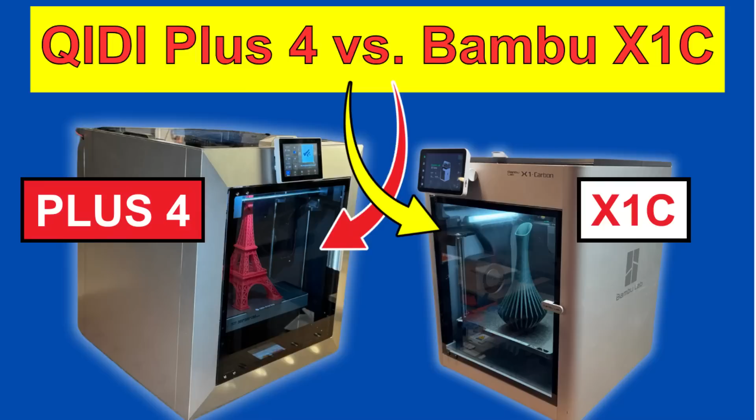The Qidi Plus 4 is a lower cost 3D printer compared to the Bambu Lab X1C. But is it a better value? That's what we're going to find out in this video.

Hi, I'm Ken of Wrist Innovations, and welcome to my Christmas edition of today's video to compare everything about the Qidi Plus 4 and the Bambu Lab X1C 3D printers, so you can make an informed decision on which one to buy if you're considering these printers.

I've organized the video into chapters listed in the description that will allow you to skip around the video depending on what is important to you. First, I jump right into comparing the print quality of both printers because I think that's the most important thing to consider when making a buying decision.

Next, I'll cover the key features of each printer and point out what they have in common as well as their differences. Then, I'll compare the unboxing and setup of both printers. Next, I'll review a required upgrade and a repair that I made to the Plus 4, followed by comparing the cost of both printers. Lastly, I will provide my final summary and recommendations.

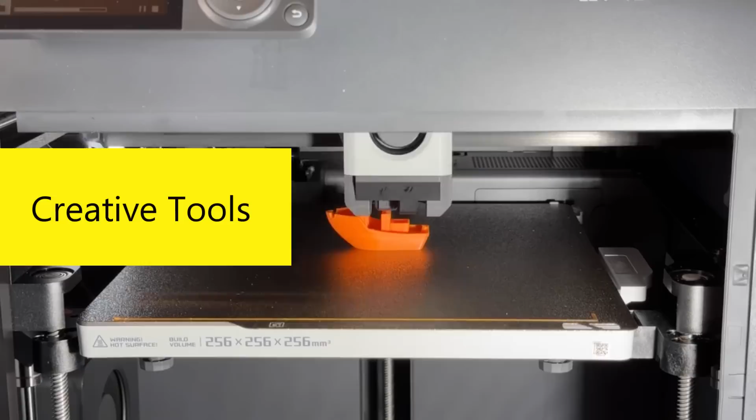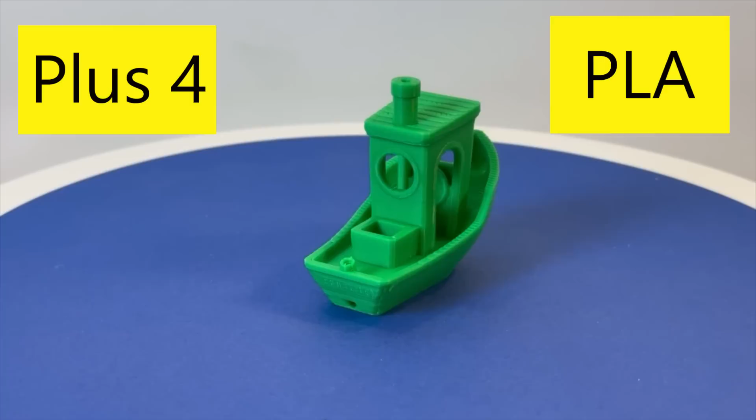I know this isn't a big challenge, but first I printed a benchy designed by Creative Tools in PLA on both printers. The X1C benchy turned out great, as expected. The Plus 4 benchy turned out very good. The back of the benchy looked like there was some under extrusion, but other than that, it turned out pretty well.

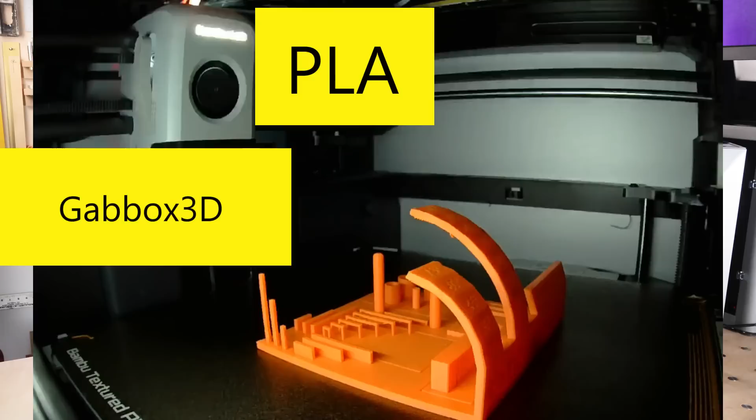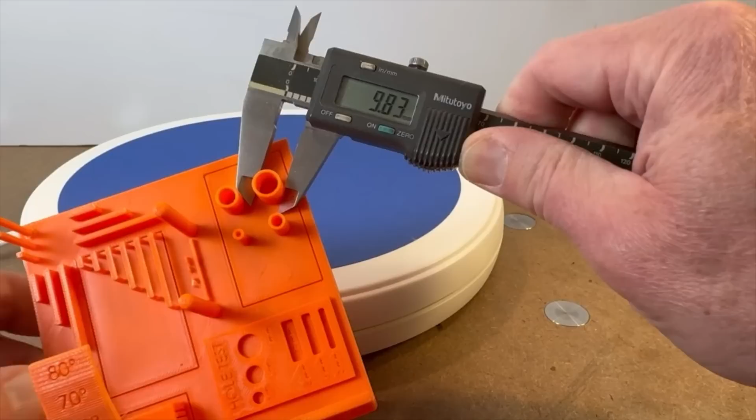I also printed this calibration test designed by Gabbox3D on Printables using PLA. For the X1C, the overhang test results indicate that there was a slight issue at 60 degrees, but it did successfully print all the way to 80 degrees. The various cylinder diameters measured 9.83 mm, 7.77 mm, 5.81 mm, and 3.81 mm versus design diameters of 10 mm, 8 mm, 6 mm, and 4 mm respectively.

The various rectangle lengths measured 10.02 mm, 19.98 mm, and 29.82 mm for design lengths of 10 mm, 20 mm, and 30 mm respectively. Bridging overall looked good, and there were only a few stringers on the part.

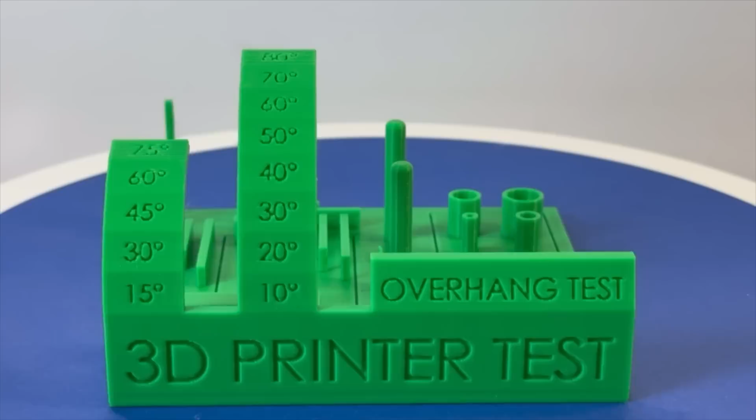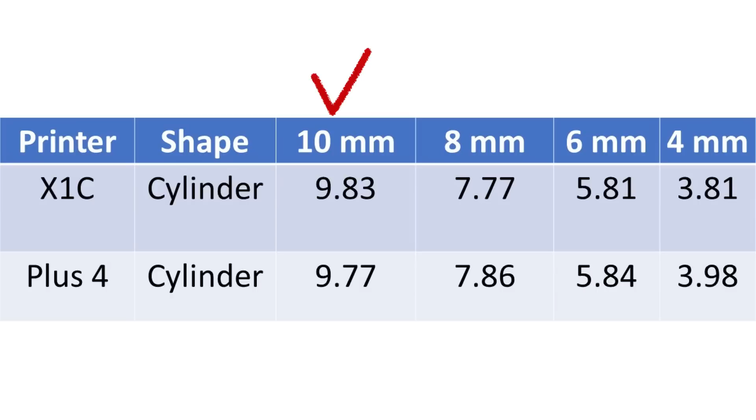For the Plus 4, the overhang test results were very good. It did successfully print all the way to 80 degrees. At 80 degrees, it was a bit rough underneath, but this is an extreme angle anyway. The various cylinder diameters measured 9.77 mm, 7.86 mm, 5.84 mm, and 3.98 mm versus design diameters of 10 mm, 8 mm, 6 mm, and 4 mm respectively.

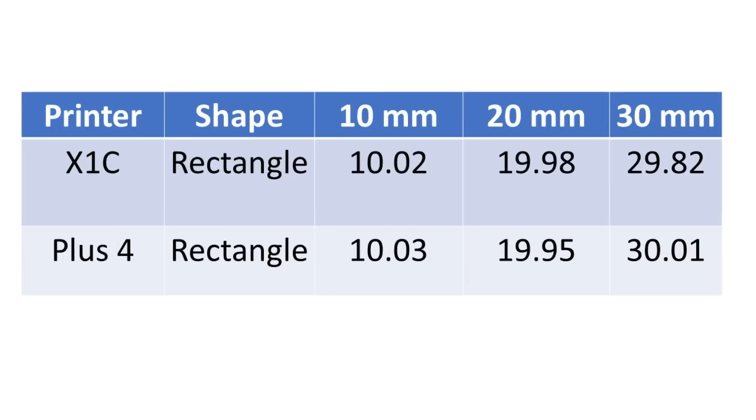The various rectangle lengths measured 10.03 mm, 19.95 mm, and 30.01 mm for design lengths of 10 mm, 20 mm, and 30 mm respectively. Bridging overall looked good, and there were little to no stringers on the Plus 4 part. Overall, I consider both calibration parts to be essentially the same quality and accuracy.

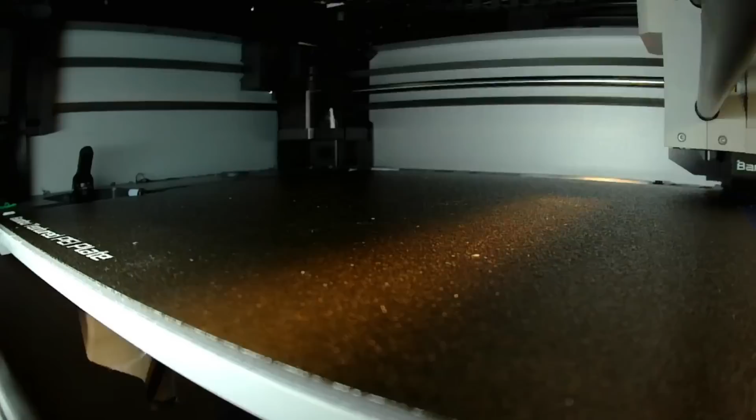Next, I printed a business card holder designed by Chris Aero Engineering on Printables using PETG. The X1C part turned out beautiful. There is an interesting pattern that the light reflects on the side of the holder, and it's on both sides.

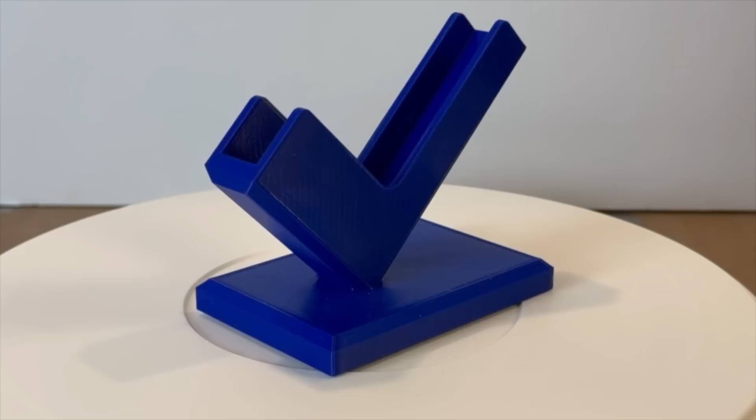The +4 part also turned out great. It also shows the same pattern on the sides of the card holder, depending on how the light reflects. Overall, I can't tell a difference between the two parts regarding quality.

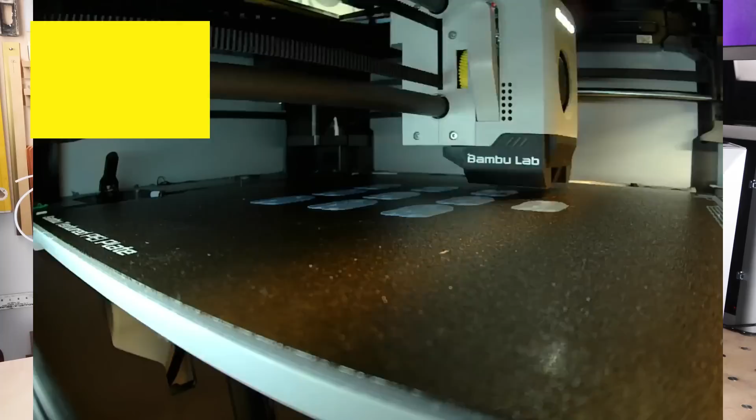This TPU is a new material from Bambu Lab that is compatible with their AMS, which is their automated material system that feeds filament into the printer. Previous TPU had to be loaded manually because it wouldn't work in the AMS. This new filament is stiffer than the normal TPU, so let's see how it prints.

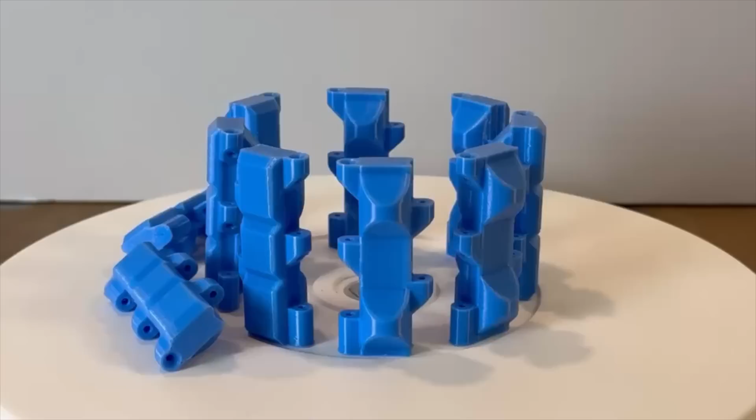For the X1C, I printed 10 pieces of these tracks for a Death Racer that I will be building shortly. The Death Racer project is a joint effort between Michael Baddeley and Sam Prentice of the Real Sam Prentice YouTube channel. Links are in the description below.

I was pleasantly surprised that there was little to no stringing with this new TPU material. The quality of the parts from the X1C turned out great. However, they are a bit stiffer than the standard TPU material.

For the +4, the parts also turned out fairly good. Again, there was little to no stringing, but there were some thin spots and they were a bit rough in some areas. I think I need to do some more fine-tuning of the filament parameters to get it dialed in with the +4.

Okay, now let's step up our game with a more challenging material, ABS. ABS can be a challenge because it tends to easily warp when printing because it really needs a warm environment. I decided to print this pipe wrench designed by 3dprintedhardware.com. For the X1C, the wrench turned out excellent. The main body, hook jaw, and nut all printed without any warping.

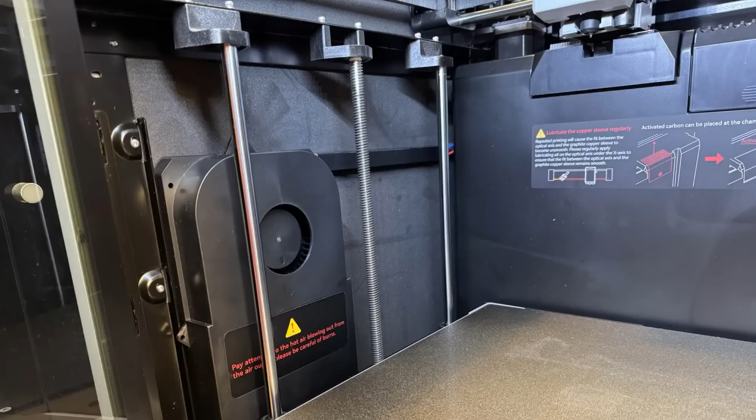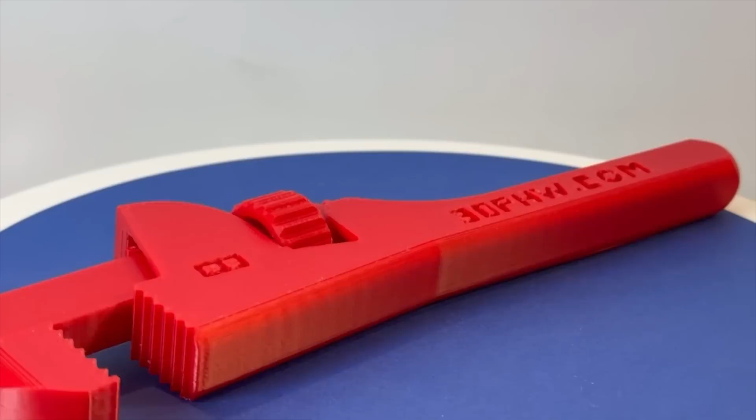For the +4, using the Qidi Studio, the standard Bambu Lab ABS filament setting uses Qidi's actively heated chamber at a setting of 55 degrees C. For the +4, the wrench had identical excellent results with no warping of any of the parts, and everything fit together perfectly. Once again, I couldn't tell a difference in the quality between the two prints.

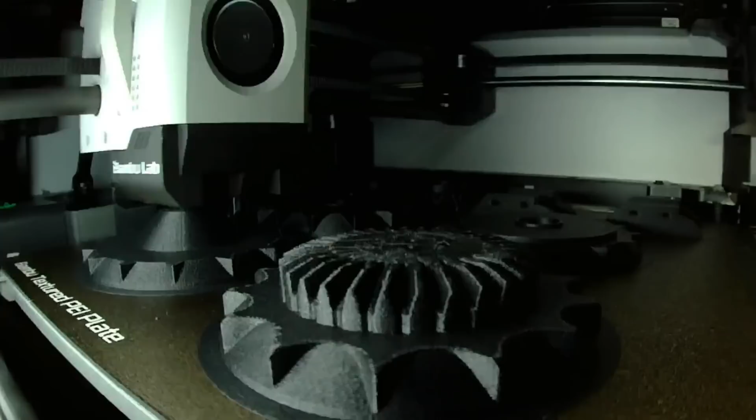Okay, now let's get wild and crazy and print with ABS glass-filled filament. I decided to print the Death Racer's drive chain parts, including a set of track wheels, motor frame, and drive gear, and they turned out perfect.

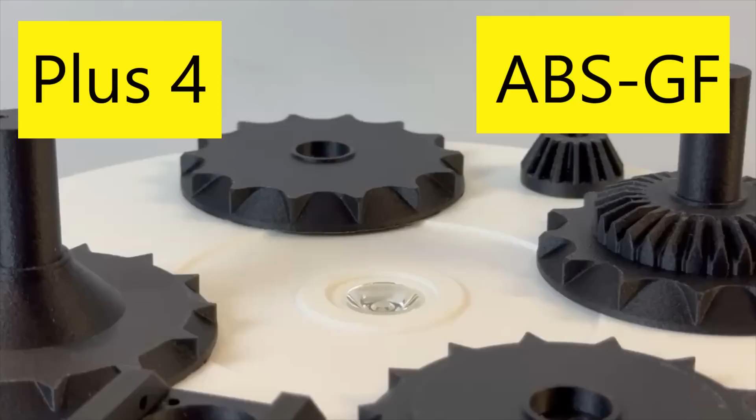I did use a brim and support to give me the best chance of success, and there was no warping on any of the parts for either the X1C or the +4 parts, and the quality was excellent from both printers. Once again, I couldn't see a difference in the quality between the two printers.

Now, do you want to get totally nuts? How about printing a nylon carbon-filled part? I specifically used Bambu Lab's PAHT-CF filament, which is a composite of PA12 nylon and carbon fiber that is particularly useful in applications where the printed part may be exposed to high temperatures.

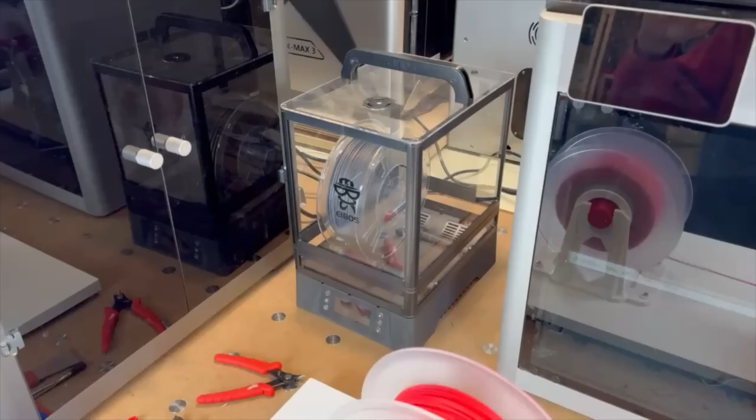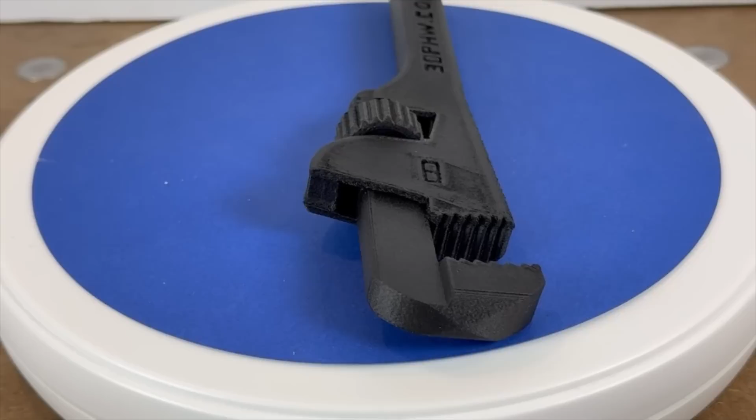Nylon is very susceptible to warping and it's very sensitive to absorbing moisture. So, as recommended, I placed a spool of the nylon CF into a filament dryer at 70 degrees C for 12 hours. Then I printed the same pipe wrench designed by 3dprintedhardware.com. First on the X1C, then on the +4.

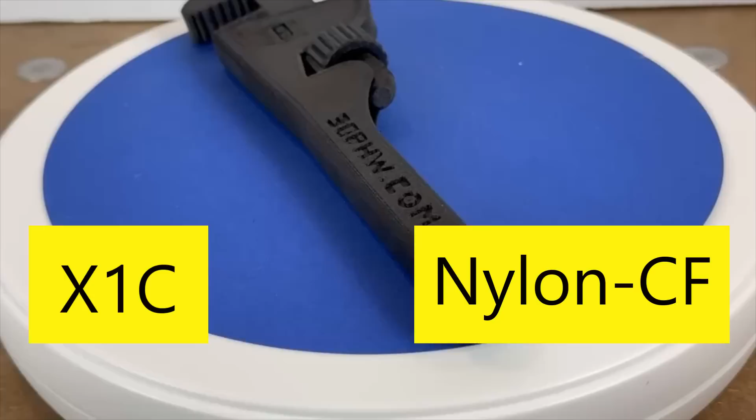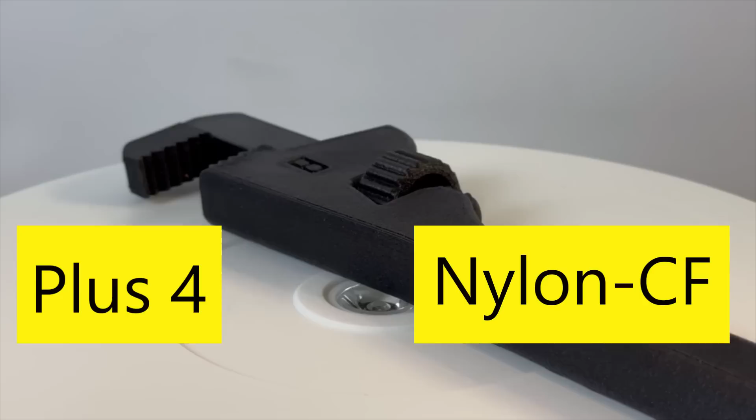For the X1C part, the hook jaw and nut printed excellently. However, the main body started to warp at the end of the print. Now, let's see how the +4 was able to print the carbon-filled nylon pipe wrench. It actually turned out great. There was a very slight warping on the tip of the hook jaw. However, the main body and the nut printed perfectly.

In the past, I have found it to be a challenge to print carbon-filled nylon because it is such a sensitive material due to the warping.

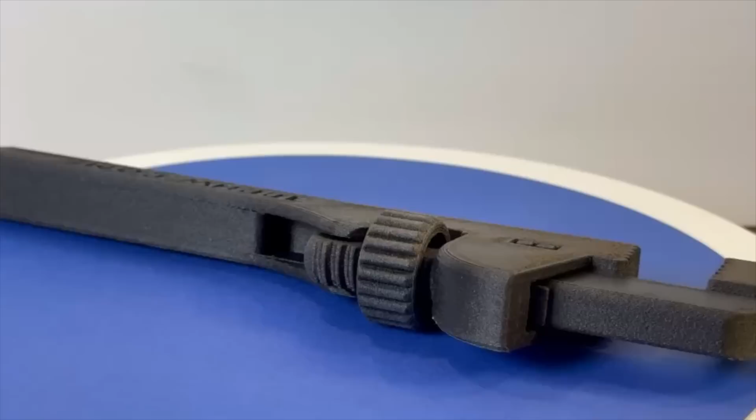Now, I performed a second nylon test, this time using Bambu Lab's PA6 nylon and carbon fiber filament. Since it was a brand new spool, I took a chance and I placed the spool directly on the printers without placing it in a filament dryer first. Then I printed the same pipe wrench designed by 3dprintedhardware.com.

First on the X1C, then on the Plus 4. For the X1C part, the wrench printed excellently with no warping. Now, let's see how the Plus 4 was able to print the carbon-filled PA6 nylon pipe wrench. It also turned out great, with no warping. So both wrenches from the Plus 4 and the X1C were identical with their high quality.

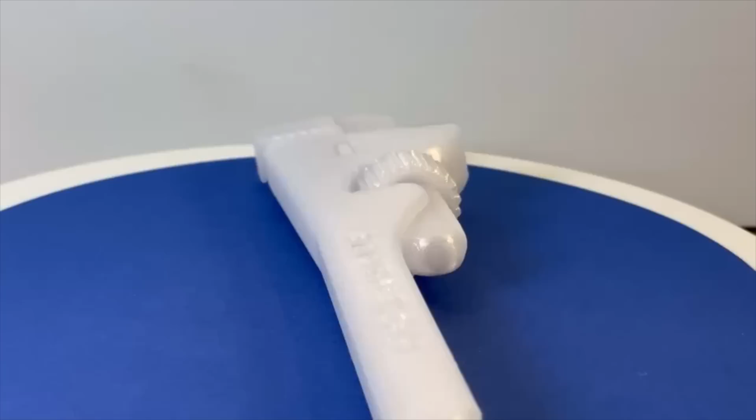I've never made any parts using polycarbonate, so I thought I would try this material to round out my filament tests for this video. Since it was a brand new spool, I thought I would live on the wild side, so I took a chance and placed the spool directly on the printers without placing it in a filament dryer first. Then I printed the same pipe wrench designed by 3dprintedhardware.com. First on the X1C, then on the Plus 4.

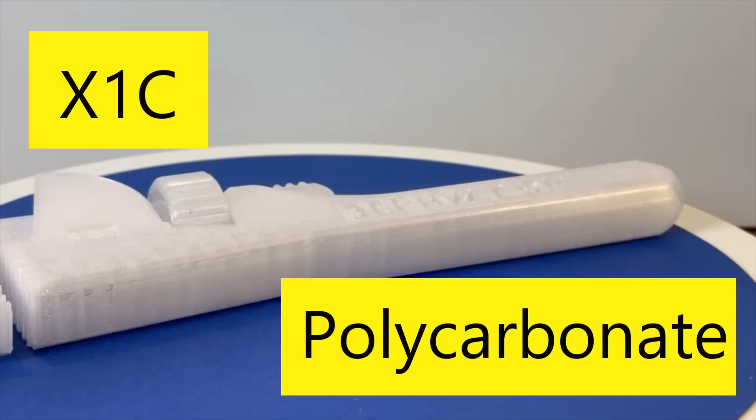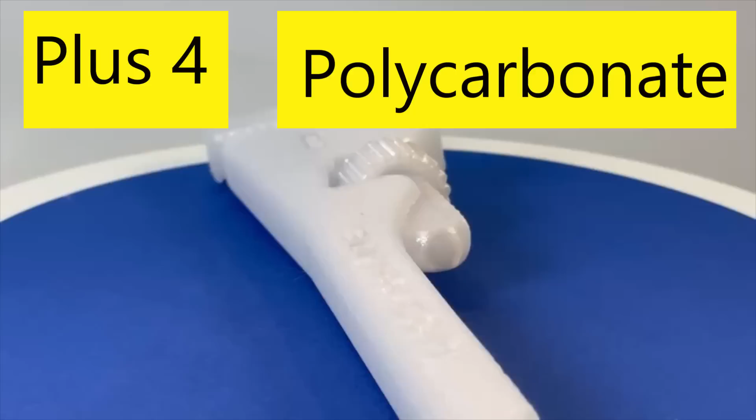For the X1C part, it printed excellently. There wasn't any warping, and the translucent wrench really turned out cool. Now let's see how the Plus 4 was able to print the polycarbonate wrench. The Plus 4 part turned out just as great as the X1C part, with no warping, and it's of the same high quality as the X1C part.

So, to summarize the parts quality section of this video, based on my experience, the Plus 4 rivals the high quality printed parts from the X1C. There may be a few slight differences in print quality that could be due to me needing to further work on the fine tuning of the settings of the Plus 4 because I used all Bambu Lab filaments during my test. I really can't see any significant differences between the print quality of these two printers.

Now, let's compare the main features of the Plus 4 and the X1C. The Plus 4 has larger overall printer dimensions of 505 millimeters by 487 millimeters by 550 millimeters versus the X1C dimensions of 389 millimeters by 389 millimeters by 458 millimeters. The Plus 4 weighs 27 kilograms versus the X1C weighs 14 kilograms. The Plus 4 is heavy enough that you should consider getting some help to unbox it or to move it around. It does have some nice handles on the top that make it easier to pick up.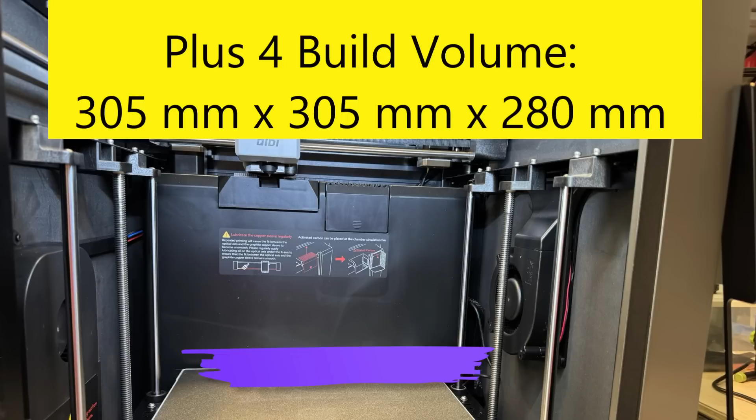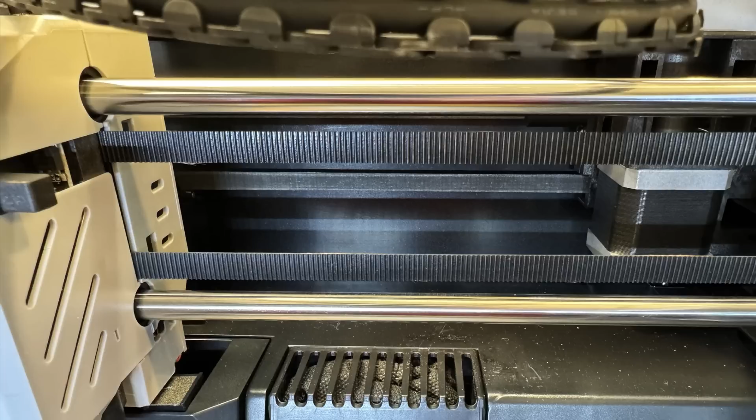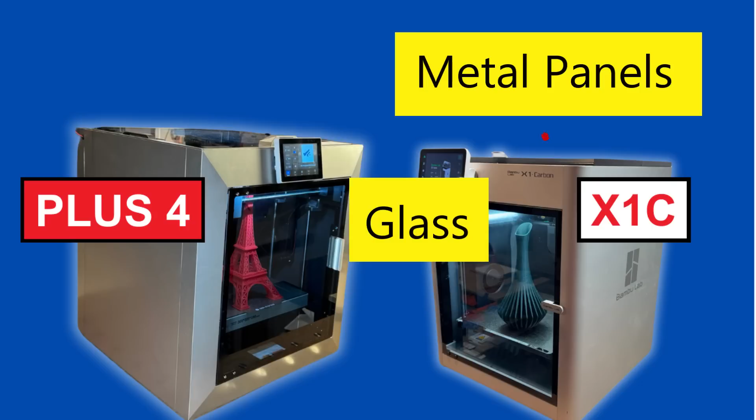The Plus 4 has a larger print volume of 305 millimeters by 305 millimeters by 280 millimeters versus the X1C print volume of 256 by 256 by 256 millimeters. They are both fully enclosed Core XY printers. The Plus 4 uses 9mm wide drive belts versus the X1C uses 6mm wide drive belts. They both have a rigid internal frame. However, the Plus 4 has metal and glass panels and doors, while the X1C has plastic and glass panels and doors.

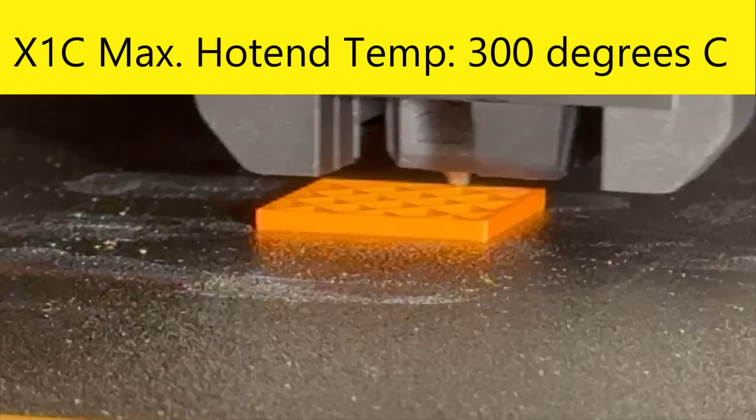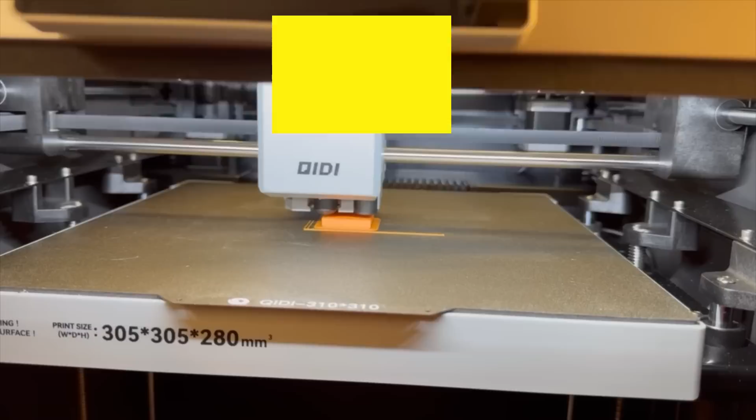The Plus 4 has a maximum hot-end temperature of 370 degrees C, while the X1C has a maximum hot-end temperature of 300 degrees C, 70 degrees lower. The Plus 4 has a maximum build plate temperature of 120 degrees, and the X1C has a maximum build plate temperature of 110 degrees at 110 volts, however only 100 degrees C at 220 volts. The Plus 4 has a maximum speed of 600 millimeters per second versus the X1C has a maximum speed of 500 millimeters per second. And they both have a maximum acceleration of 20,000 millimeters per second squared.

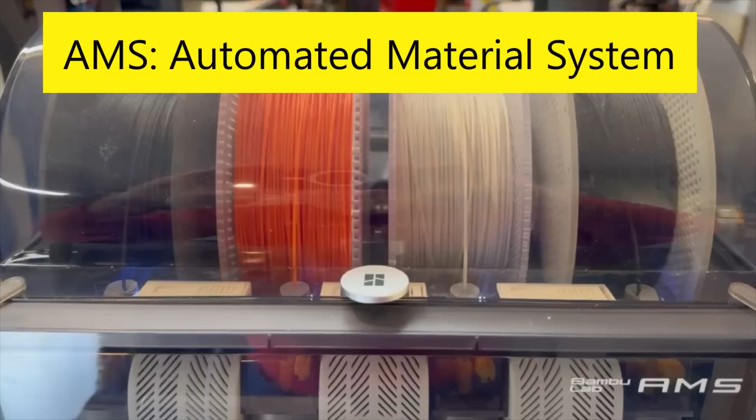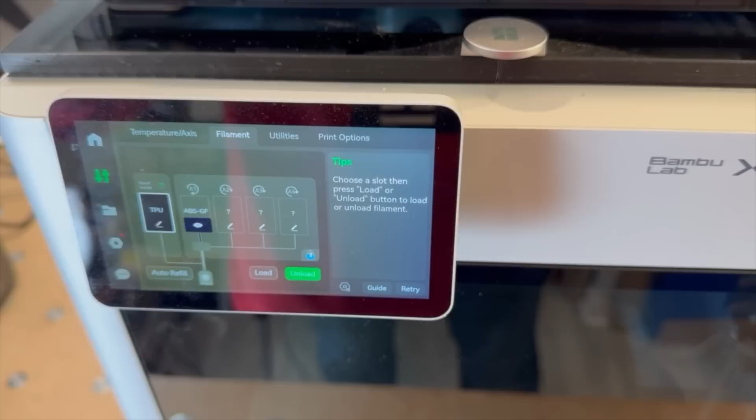They both have a filament runout sensor and a chamber fan with a carbon filter. They both have a nozzle wipe feature. The X1C has multicolor filament / multi-material capability when using the Bambu Lab AMS, which is their automated material system. And they can take advantage of the Bambu Lab RFID tags in the Bambu filament spools that allow the AMS to recognize the color and the amount of specific materials on each spool. The Plus 4 is compatible with Qidi Tech's future version of their AMS, which they call the Qidi Box, which should be available during the first quarter of 2025. I don't know if Qidi plans to have RFID tags on their filaments in the future.

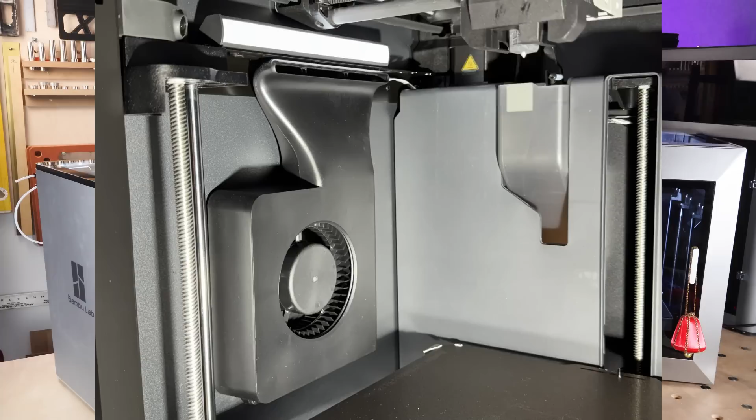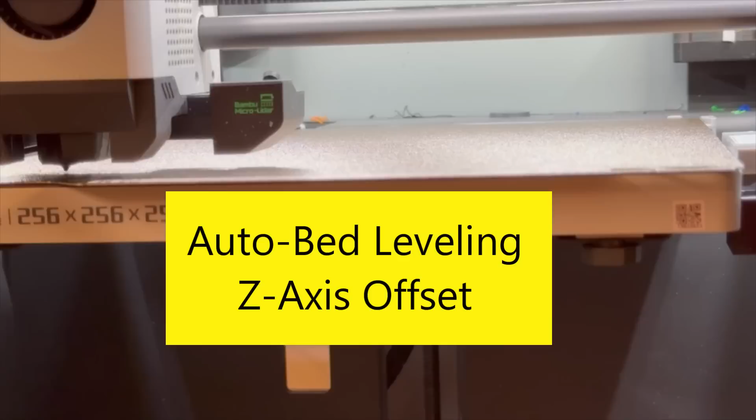Both come with an auxiliary parts cooling fan and a textured PEI build plate. The X1C works with the Bambu Studio Slicer and their phone app called Bambu Handy, while the Plus 4 works with the Qidi Studio Slicer and their phone app. Both printers print wirelessly using their slicers or the phone apps. They both have auto bed leveling, Z-axis offset, power loss recovery, and an internal LED light. The Plus 4 has a brighter LED strip, and it's easier to see inside the printer with the doors closed.

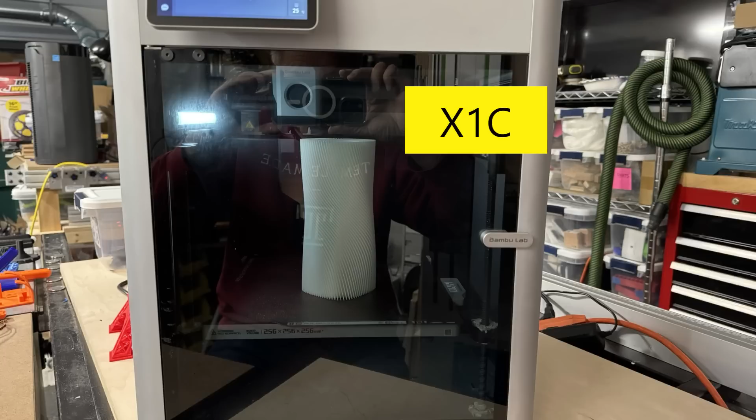It's hard to see inside the X1C even with the light on due to the low amount of light from the light bar, and due to the smoked glass door and top. They both can be set in LAN mode, which allows you to print directly to your printers via your network. You can print the following filaments on both printers: PLA, PETG, TPU, ABS, ASA, nylon, and carbon or glass-filled polymers.

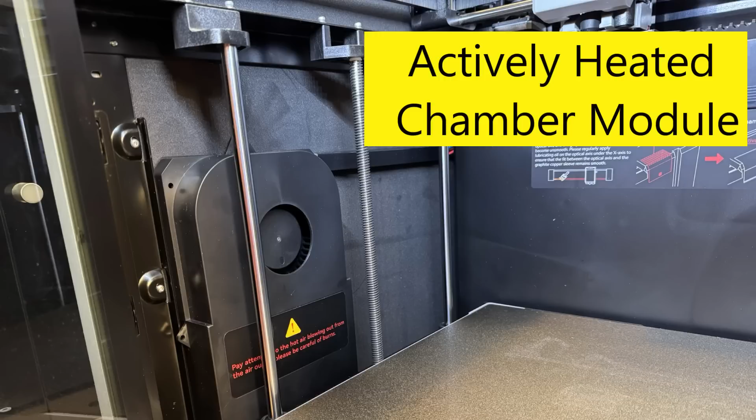The Plus 4 has an actively heated chamber heater that has a maximum temperature of 65 degrees C, while the X1C does not have an actively heated chamber. There have been studies that show an actively heated chamber can reduce the warping of especially difficult materials such as nylon.

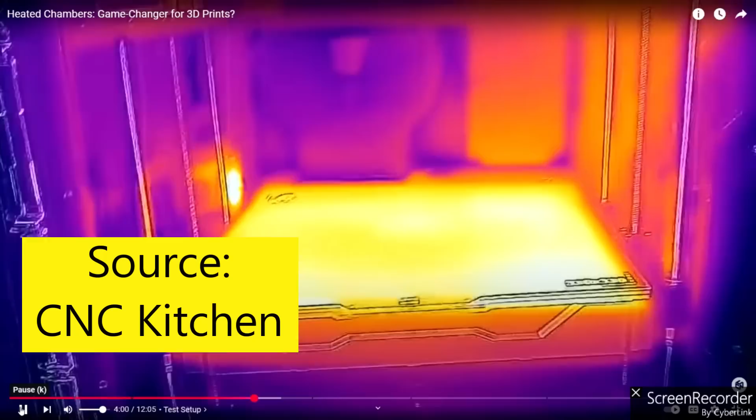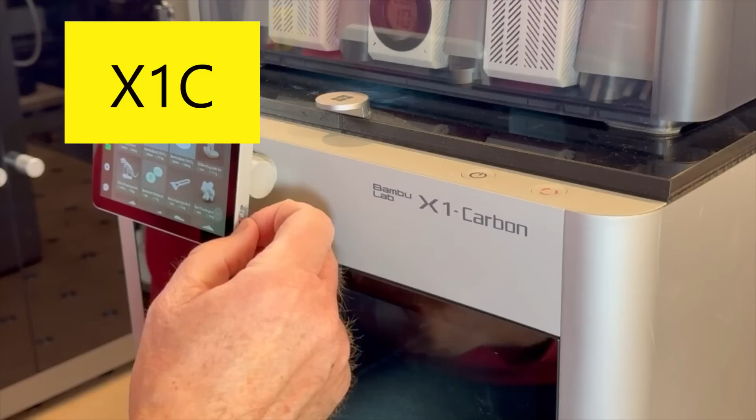Both printers have nice 5-inch color LCD touchscreens to communicate with the printer. Both have high resolution 1080p cameras. File storage memory is different between the two printers. The Plus 4 has 32 gigabytes of eMMC and a USB 2.0 flash drive, while the X1C has 4 gigabytes of internal memory plus the removable micro SD card.

The X1C has LiDAR, which provides a filament flow calibration, first layer inspection, and spaghetti detection. However, the Plus 4 does not have this feature. Now let's talk about unboxing and the setup. Both printers have similar unboxing instructions.

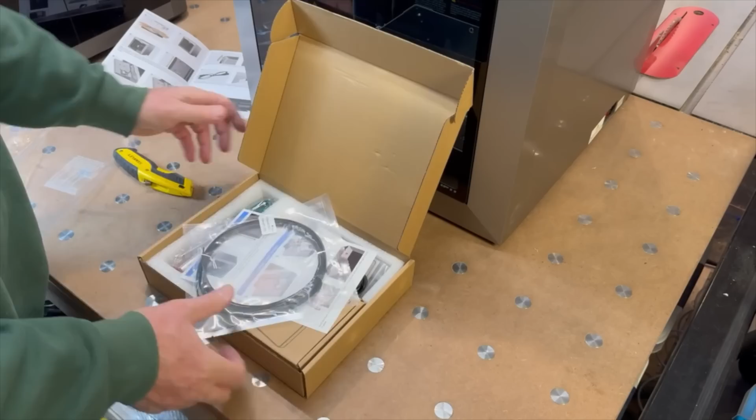For the Plus 4, as I mentioned earlier, it is a heavy printer, weighing 27 kilograms, so you may want to get some help lifting the printer out of the box, and also when you move it around. It does have 2 handles on top, which makes this task easier. The first accessory box has a small sample of filament, Ethernet cable, 5-inch LCD screen, lubricants, miscellaneous tools, a glue stick, door handle, and a scraper.

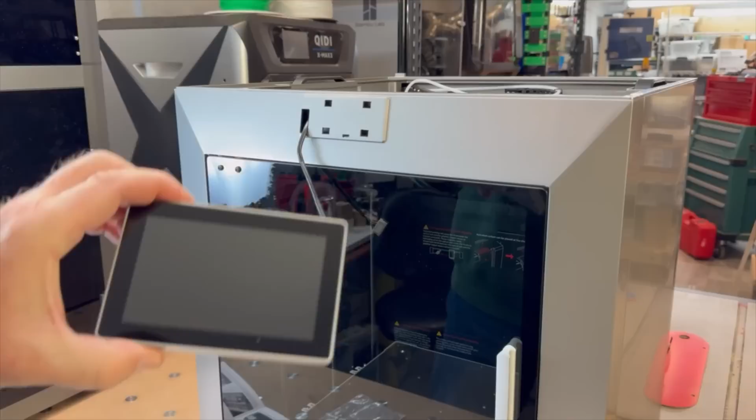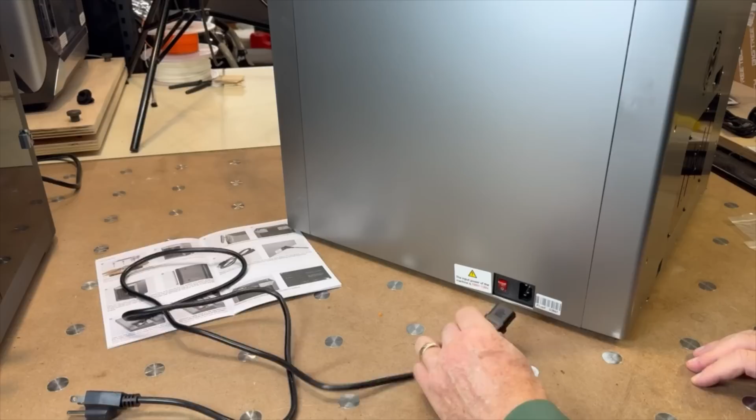First, install the door handle. Next, install the LCD screen by connecting the cable to the back of the screen and snapping the screen to the printer. The second accessory box contains the power cord and filament holder. Attach the power cord and plug it into an electrical outlet and turn on the printer. Follow the screen prompt by choosing your preferred language. Per the screen prompt, remove the cable ties and tool head packaging.

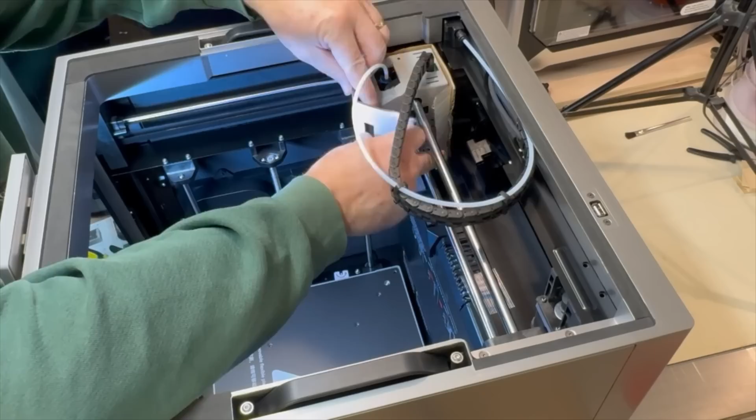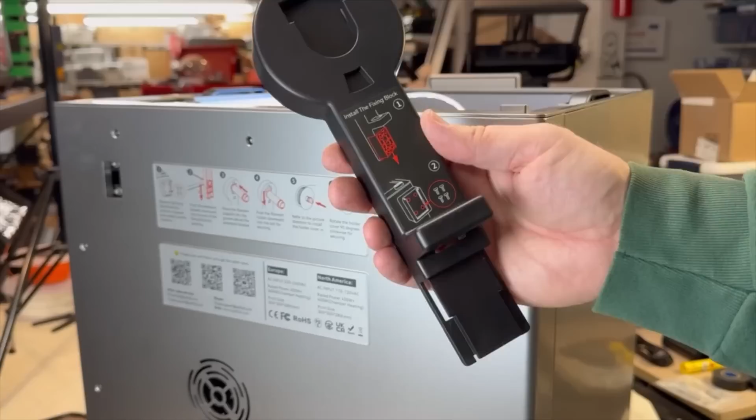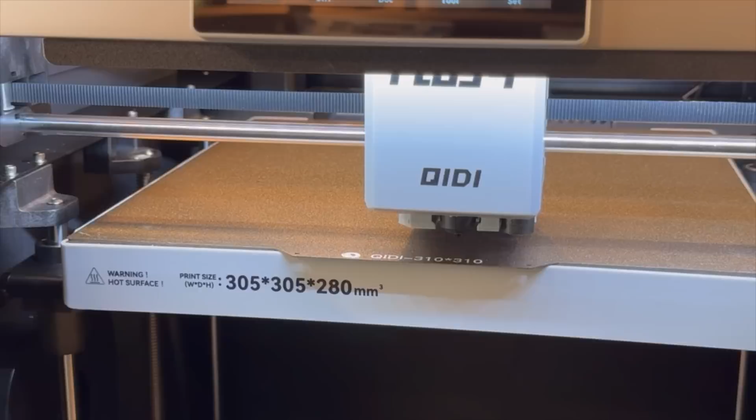Remove the carbon filter and remove the filter from the packing and reinstall it back into the printer. Remove the 4 screws holding the build plate to the printer frame. Then, initialize the build platform movement. Next, install the filament holder. Then, load some filament. After that, set the nozzle temperature. Then, perform the automatic Z-axis offset function, and then next, perform the input shaping function. Finally, you're ready to print your first print.

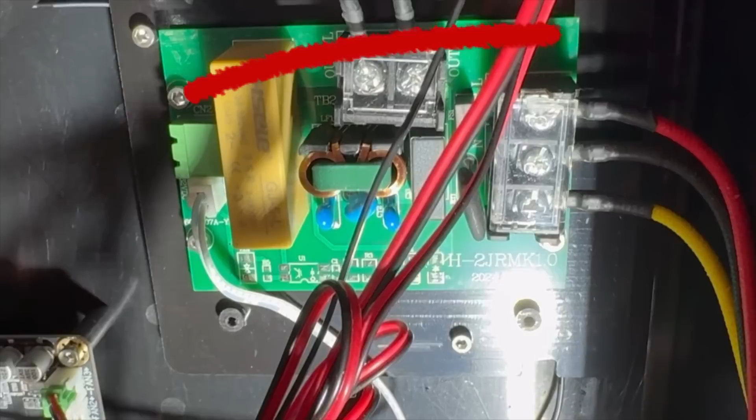Now let's talk about a required upgrade and a repair. Now we should talk about the elephant in the room, and that's the SSR design defect for the 110 volt versions of the printer that have experienced overheating and damage to the SSR board, which indicate a possible safety fire hazard. I first heard about this issue from some other YouTube creators that discovered this problem. Noizie Works and 3D Musketeers both have uploaded videos on this topic, and I provided their links in the description below.

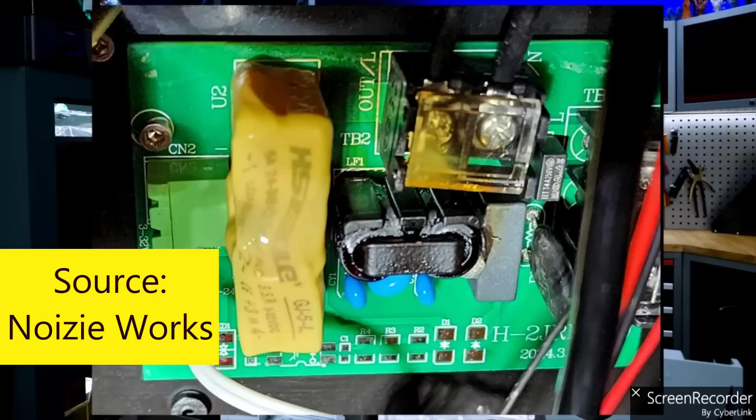In layman's terms, as I understand the SSR issue, the original design of the SSR board was seeing excessive amps for the 110 volt versions of these printers, which caused overheating and degrading of the components of the SSR board. Here is a close-up clip from the Noizie Works video, and you can see the part has excessive damage, and you can see the part has seen excessive heat. Initially, Qidi reassured the public that there wasn't a fire hazard with the original SSR board.

After what some people thought was a delayed response, on November 11, 2024, Qidi's CEO did address the problem by issuing the following statement, and here are the highlights. They designed and shipped a newly designed SSR board to all customers that had the original SSR board. They extended the warranty of the Plus 4 by an additional year. They offered any customers not comfortable with replacing the SSR boards themselves to ship the Plus 4 back to Qidi for a full refund. And lastly, they committed to implement a more rigorous testing phase before releasing new products.

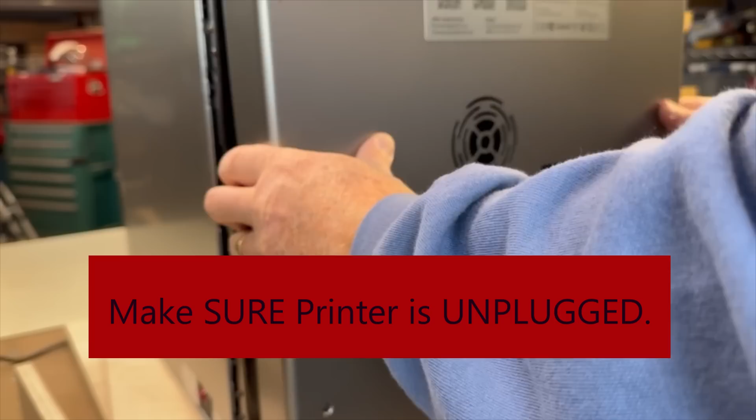Now I'll briefly show you how I replaced my SSR board with the newly designed SSR board. First, remove the screws from the back panel. Then, remove the SSR board cover. Loosen the screws and remove the old SSR board. Disconnect the wires from the old SSR board.

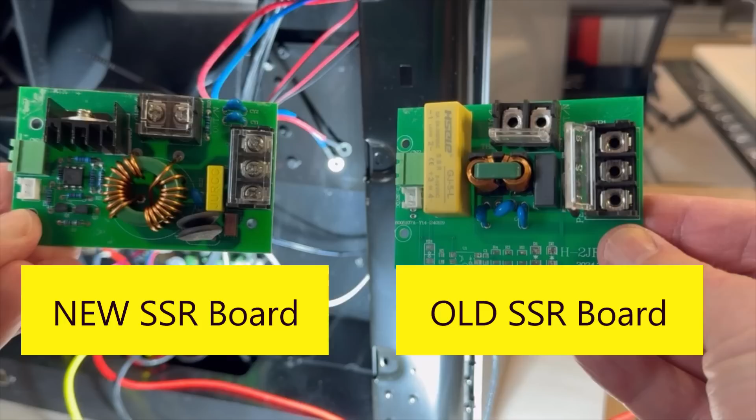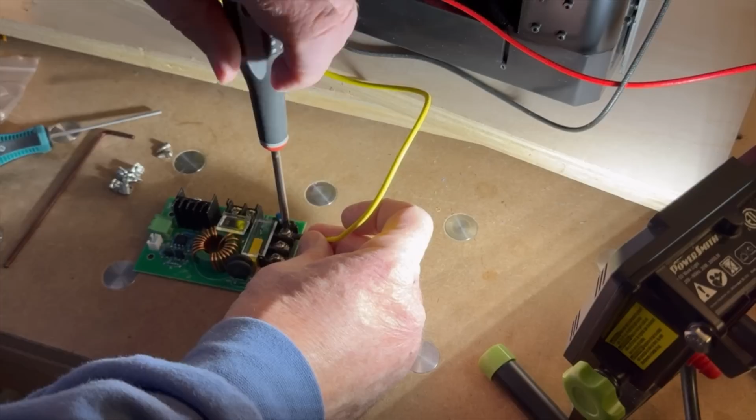Here's a view of the old and new SSR board side by side. The new SSR board is on the left and the old SSR board is on the right. Attach wires to the new SSR board, but be very careful because the mains wires positions have changed per the photo. The old SSR board had the mains wires in the order of red, black, and yellow from top to bottom, while the new SSR board has the mains wires in the order of yellow, red, and black from top to bottom. Please see Qidi's documentation for the latest wiring diagram.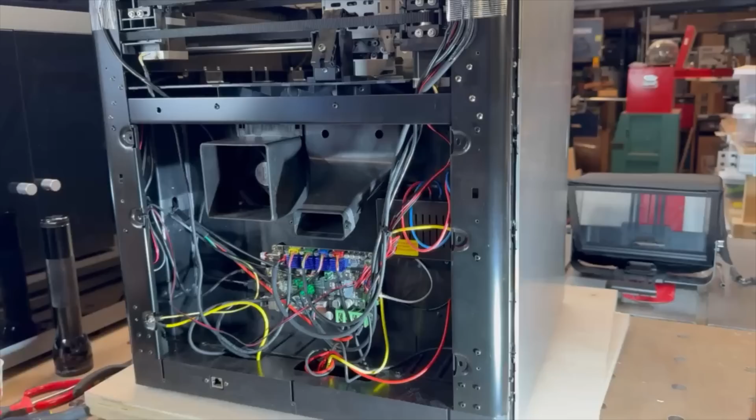Next, install the new SSR board. Attach the 2-wire cable to the new SSR board. Attach the new SSR board cover. Next, reattach the back panel and secure using all the back panel screws that were initially removed. Then install the back panel fan. Qidi also has a video on how to replace this board.

So for my Plus 4, I was able to print various materials like PLA and PETG and TPU. However, when I tried to print ABS that required using the chamber heater, I received the following error message. I contacted Qidi Tech support and they were very responsive. They recommended that I try to turn on the chamber heater by setting the chamber temperature to 55 degrees C. And again, I received the same error message.

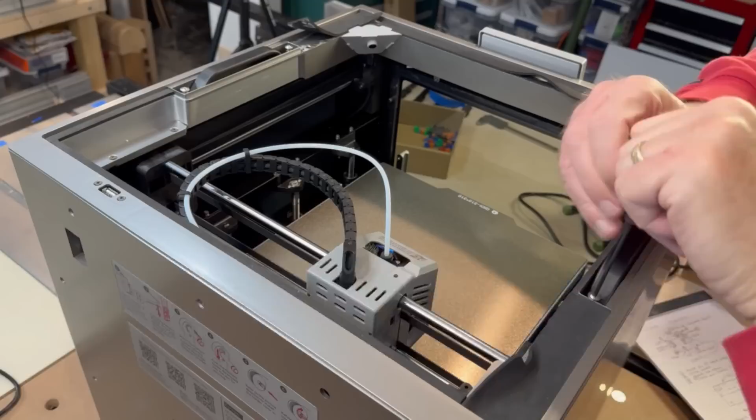So they concluded that the chamber heater fan had failed during shipping and the chamber heater was getting too hot because there wasn't any airflow across the heater. They sent me a replacement chamber heater and the fan assembly, and here's how I replaced the part. First, remove all the top frame screws. Then, detach the camera. Next, remove the top frame.

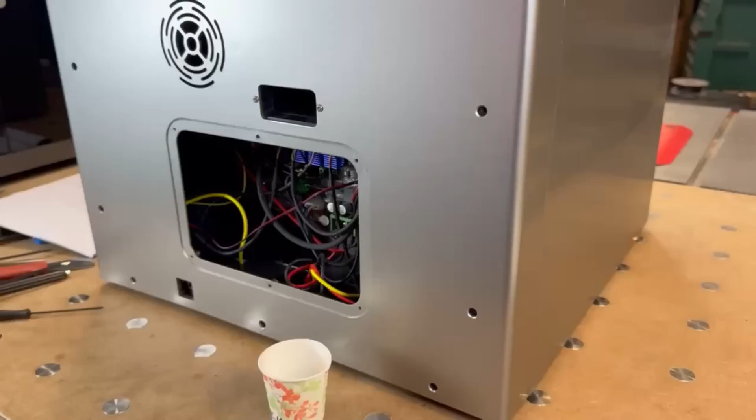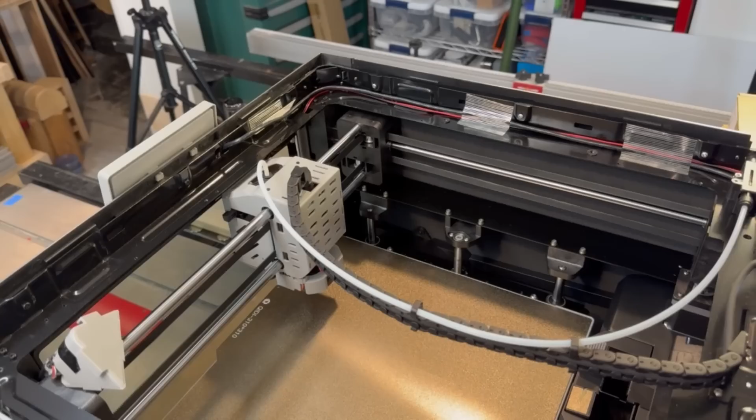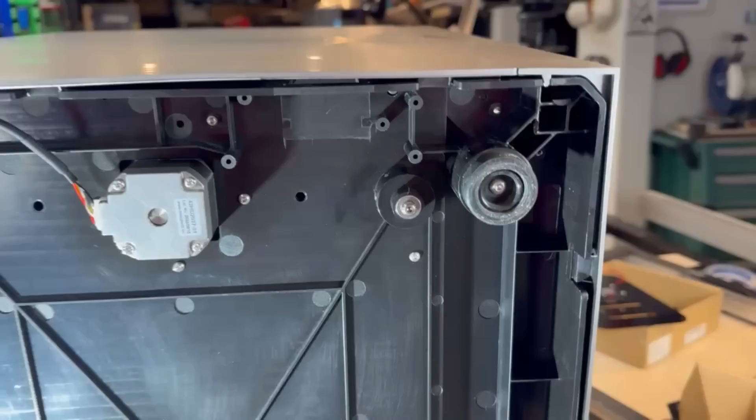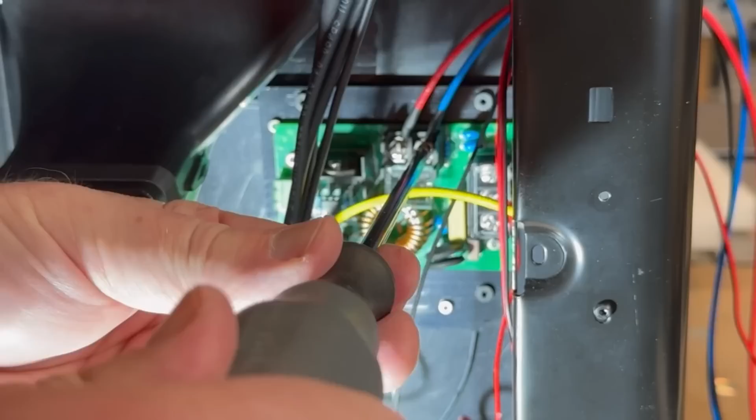Then, remove all the screws from the back panel and remove the panel. Next, remove the bottom panel. Next, remove the 3 screws from the left side panel top and left side panel back. Then remove the 3 screws from the left side panel front. Then remove 2 screws from the bottom that are holding the chamber heater assembly to the frame. Remove the left panel and then remove the chamber heater from the left panel. Disconnect the chamber heater wires from the SSR board and the motherboard.

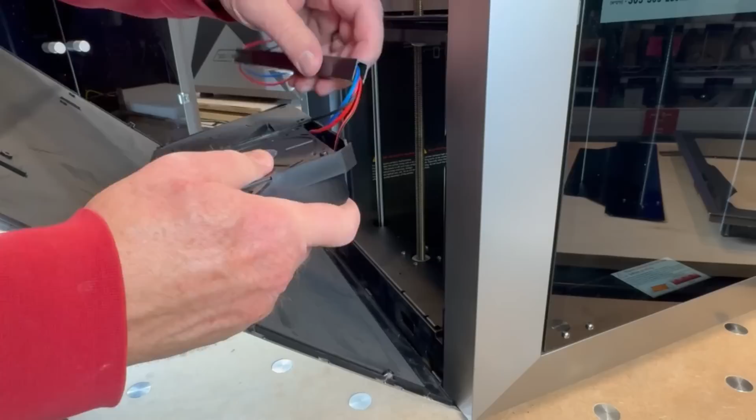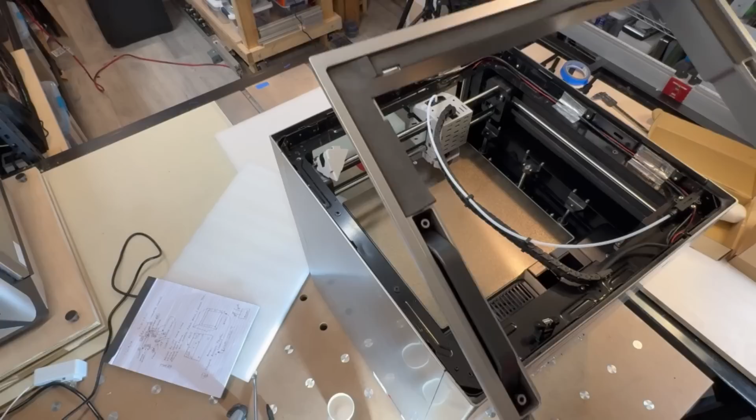Next, route the wires from the replacement chamber heater into the frame and reattach the heater to the left panel. Reattach the left panel to the printer in the reverse order of when it was removed. Reattach the top frame to the printer. Next, reattach the camera to the top frame, followed by reattaching the chamber heater wires to the SSR board and the motherboard. There was a fair amount of dismantling of this printer to get all these wires of the chamber heater installed. However, once I reassembled everything, I was back in business because the new heater worked.

This is the second out-of-box failure I've experienced with Qidi printers. When I received my X-Max 3, one of the power supplies was defective and I had to replace that. Based on my limited experience with Qidi printers, as well as other things I've read or seen online, I think Qidi has some areas of improvement to be made on the quality assurance of their products. I think they have made improvements within the last year or so.

However, the issues such as the chamber heater SSR board overheating, customers' concerns with possibly coming into contact with the Q1 Pro's chamber heater, I think have caused potential customers to lose confidence with the Qidi printers. Their CEO has made a commitment to improve the robustness of their testing of their new products, so hopefully we'll see improvement in this area in the near future.

Okay, let's compare the cost of the printers. At the making of this video, December of 2024, Bambu Lab is currently having an end-of-year sale on all of their printers. The Bambu Lab X1C is on sale for $1,099 and the Qidi Plus 4 is on sale for $799, a price difference of $300 versus the X1C.

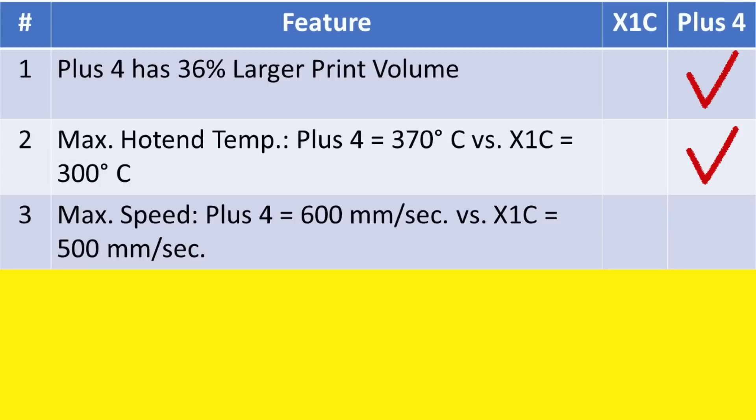Number 2, the Plus 4 has a maximum hot end temperature of 370 degrees C versus the X1C maximum temperature of 300 degrees C. So if you're focused on the higher temperature engineering materials, the Plus 4 has the edge. Number 3, the Plus 4 has a maximum speed of 600 millimeters per second versus the X1C maximum speed of 500 millimeters per second. However, in reality, I don't think this is a significant difference, at least to me, because these are theoretical speeds, and most times the design of your part and the filament materials you use dictate the speed needed to make the part.

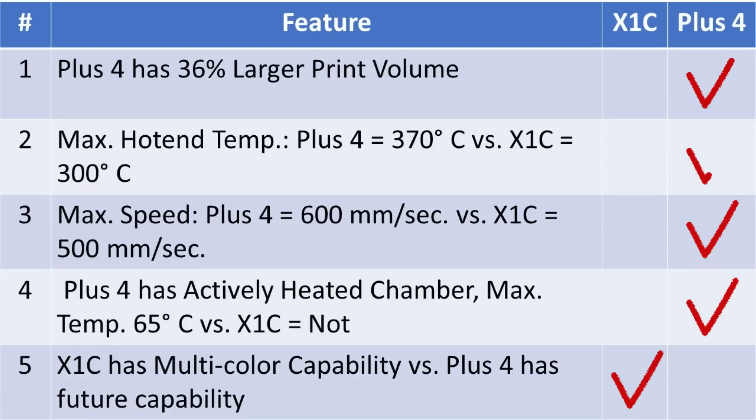Number 4, the Plus 4 has an actively heated chamber heater, maximum temperature of 65 degrees C, while the X1C does not have an actively heated chamber. So again, if you are focused on higher temperature engineering materials, then the Plus 4 has the edge. Number 5, the X1C has multicolor, multi-material capability if the AMS is purchased. The Plus 4 won't have this capability until the first quarter of 2025. So if you need multicolor capability, the X1C definitely has the edge because they have proven technology in their AMS unit.

The Plus 4 has 32 gigabytes of eMMC and the USB 2.0 flash drive memory. The X1C has 4 gigabytes of internal memory storage and a micro SD card. So for me at least, I don't think this is a significant difference between the two printers. Number 7, the X1C has LiDAR, which provides filament flow calibration, first layer inspection, and spaghetti detection, while the Qidi Plus 4 does not have this feature. Although LiDAR is a nice-to-have feature, I don't know how to quantify the benefit of having this. You'll need to decide if this is important to you, but in any case, this would be a vote for the X1C.

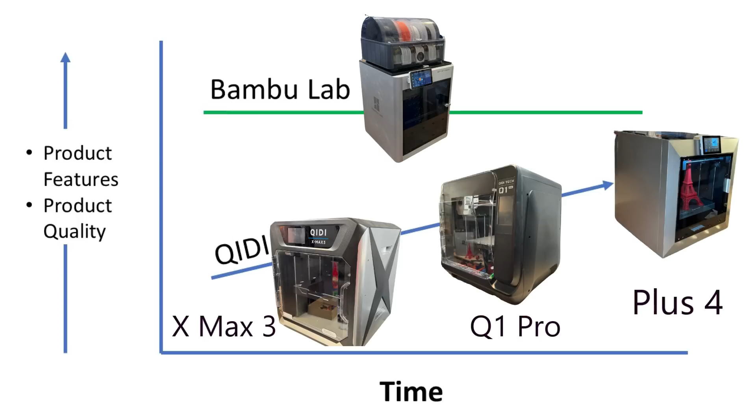Number 8, the Plus 4 has an improved internal LED light versus the X1C, so it is easier to see inside the Plus 4 while printing. This is a creature comfort thing, but I really do like the Plus 4 LED, so I give the Plus 4 the edge. Number 9, let's talk about equipment product quality. I think Qidi Tech has been catching up to Bambu Lab regarding equipment product quality with the evolution of their X Max 3, then their Q1 Pro, and now most recently their Plus 4. They have addressed many design complaints that people raised with the X Max 3 and the Q1 Pro.

So I think the Plus 4 is the closest Qidi has come to offering a competitive alternative to the Bambu Lab printers. I think they need to improve their quality assurance and product testing of their printers before they launch new designs, as evident in this most recent Plus 4 SSR board issue. The good news is that Qidi's CEO has recently stated they will improve in this area of their process. So it will be interesting to see how their next printer does when it is launched.

Overall, as long as you are aware that things are not perfect with the Qidi Plus 4, based on everything I've covered above, then I think the Plus 4 offers several advantages over the X1C, and it could be a higher value for your money to suit your 3D printing needs. If you prefer taking the safer route based on the many satisfied customers that have been using the Bambu Lab X1C, and if higher temperature engineering materials are not your focus, then the X1C may be the better choice for you.